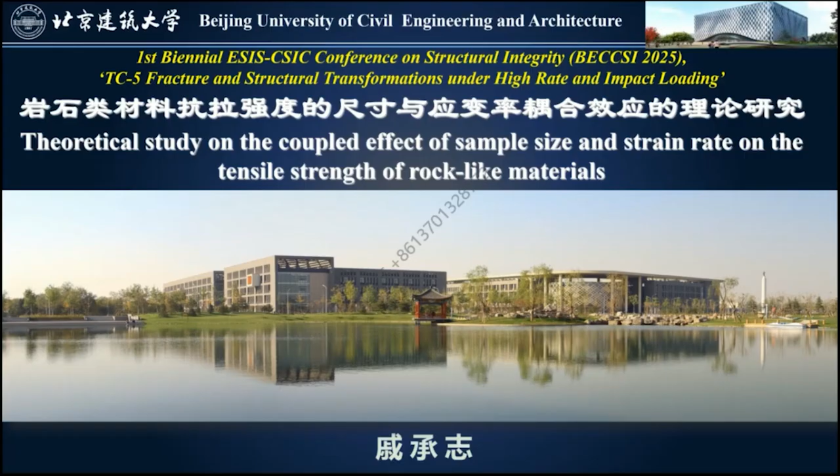My report includes the following parts. The first part, introduction.

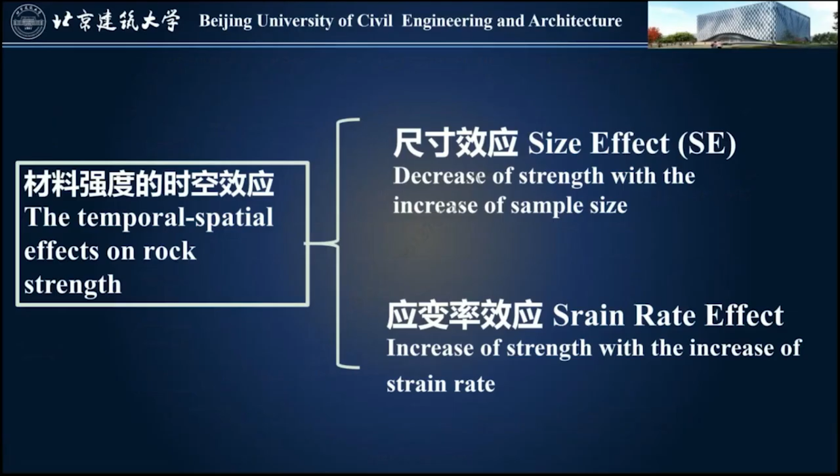The temporal spatial effects on rock strength include size effects, meaning decrease of strength with the increase of sample size, and the strain rate effect, meaning increase of strength with the increase of strain rate.

As to size effects, there exist several models. The first, statistical model, described by Weibull's theory of random local material strength. The second, type 1 size effect, energetic or deterministic nature, occurring in the fracture caused by crack initiation on

the smooth surface of the sample. The third, type 2 size effect, occurs in materials with a deep notch or deep stress-free crack formed stably before reaching the maximum loading. This model is based on fractal or self-similarity concept.

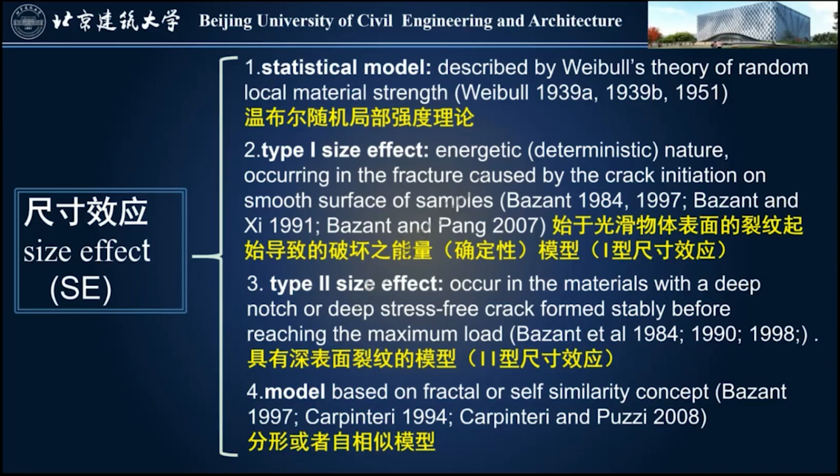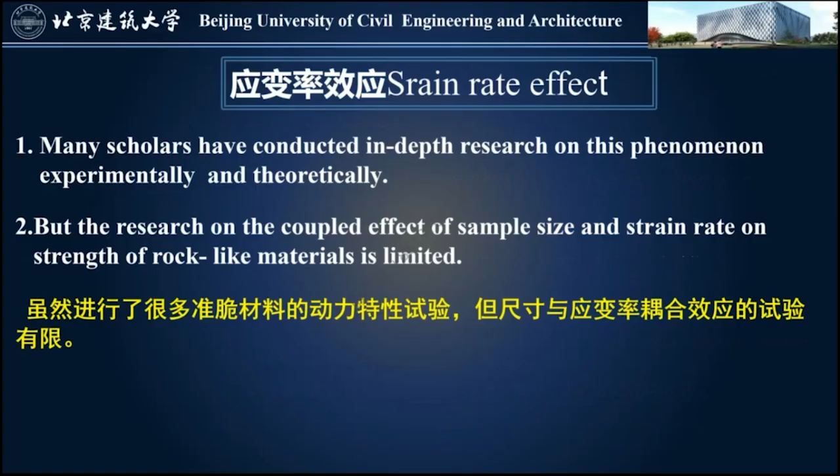As to strain rate effect, many scholars have conducted in-depth research on the phenomenon experimentally and theoretically, but the research on the coupled effects of sample size and strain rate on strength of rock-like materials is limited.

Study of Hong et al. on several kinds of rock under compression revealed that the dynamical strength of rock increases according to the power law with the increase of strain rate, and at the same strain rate, the dynamical strength of rock increases with the increase

of specimen size. For a specimen of certain size, there exists a critical strain rate below which the static size effect dominates. For a given strain rate, there is a critical size. When the sample size is larger than this size, the dynamical size effect is dominant.

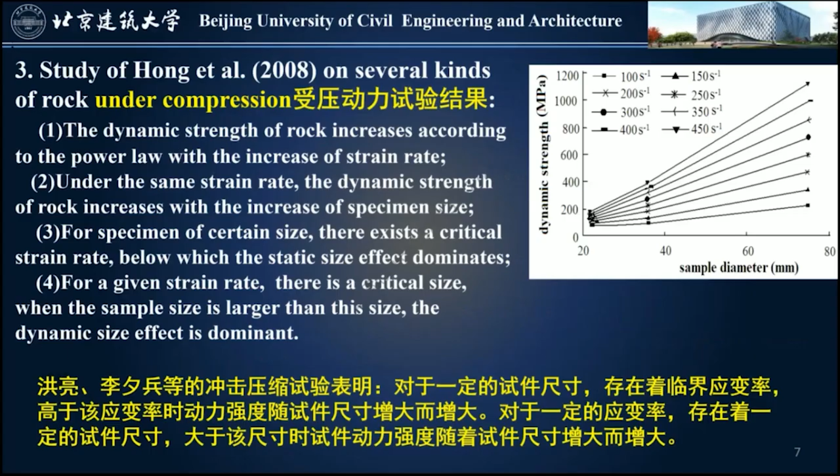Qi et al. explained the dynamical size effect observed in Hong et al. Qi et al. revealed that the essence of the strain rate effect is that the deformation and fracture process of small-scale elements in the sample are activated before the complete breaking of the sample, with the increase of strain rate due to the finite crack propagation speed.

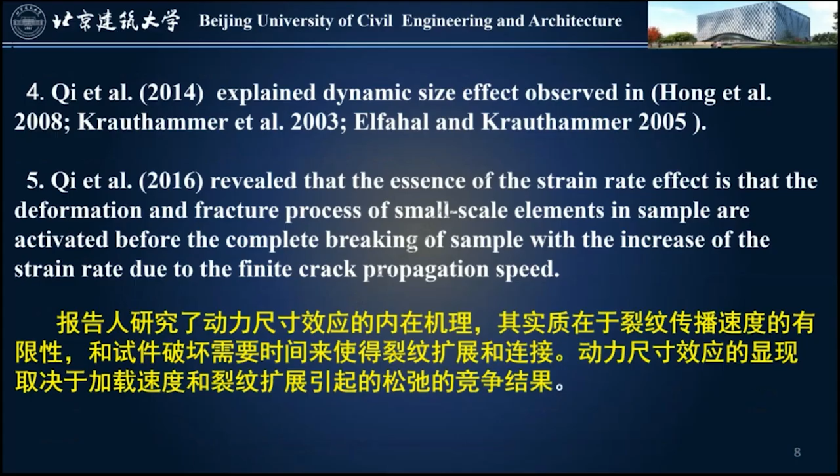Asadi et al. studied the combined effect of loading rate and sample size on tensile strength, and revealed that the notched specimen is more sensitive to the loading rate.

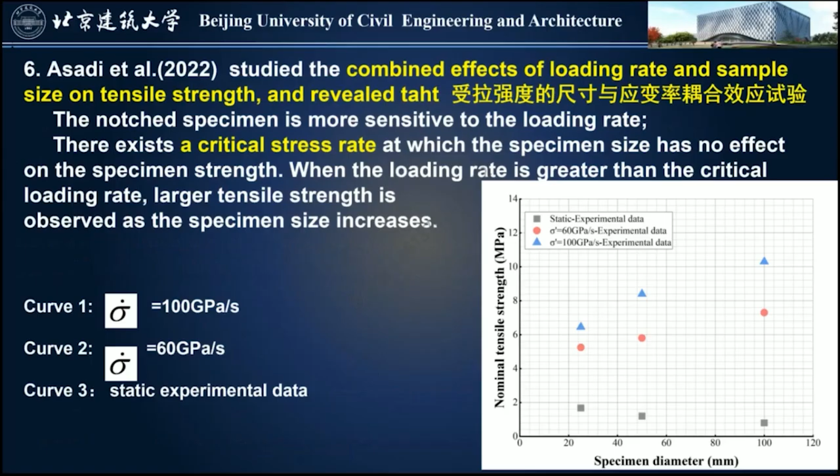There exists a critical stress rate at which the specimen size has no effect on the specimen strength. When the loading rate is greater than the critical loading rate, larger tensile strength is observed as the specimen size increases. This figure shows the experimental data.

Remarks: The current research on the coupled effect of sample size and strain rate on strength of quasi-brittle material was basically experimental. Some formulae for the coupled effects of sample size and strain rate on strength were obtained by data fitting. The physical meaning of the obtained data fitting formulae is unclear.

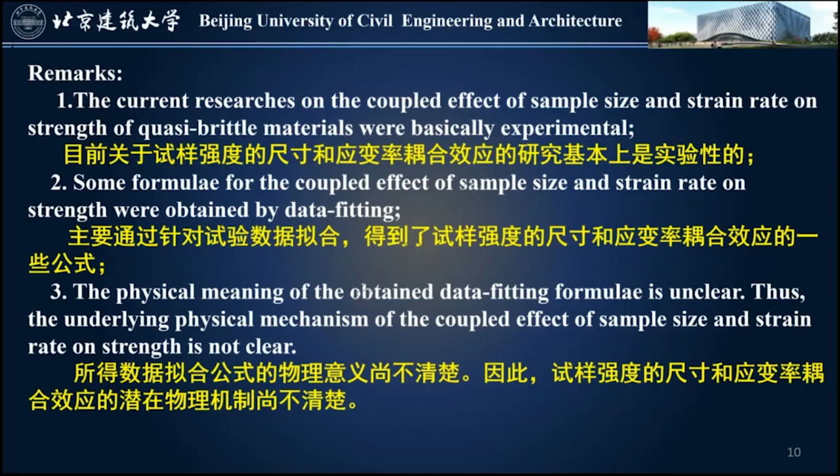Thus, the underlying physical mechanism of the coupled effect of sample size and strain rate on strength is not clear. Therefore, the purpose of the study is to quantitatively predict the nominal tensile strength of rock mass with different sizes and different strain rates, to clarify the underlying physical mechanism of coupled size and strain rate effects.

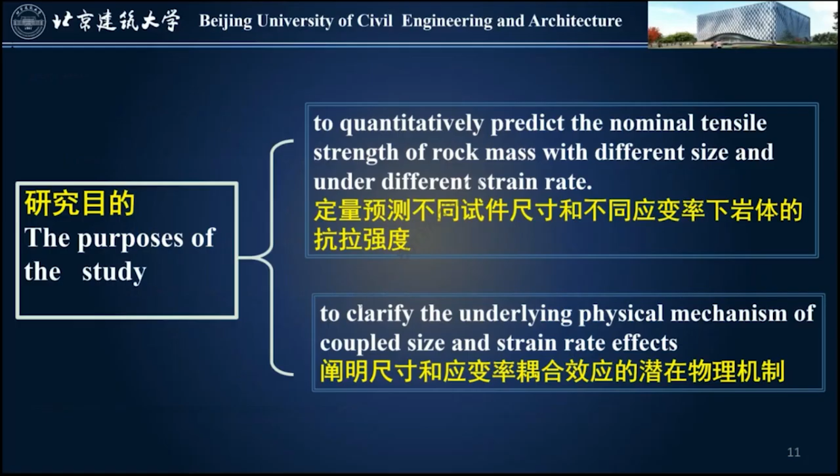Part 2: The coupled effects of sample size and strain rate on tensile strength in the quasi-static regime. The dynamical tensile strength includes two parts: the thermally activating strength component under quasi-static loading, and the macroscopic viscous component under dynamic loading. In the following, we examine the two parts of strength.

And the quasi-static tensile loading: Deformation and failure of material is a thermally activating process.

The expected lifetime of material can be determined by the Zhurkov's formula, in which U0 is the activation energy, sigma T is the uniaxial tensile stress, gamma is the activation volume, K is the Boltzmann's constant, T is the absolute temperature, tau 0 is a temporal parameter in the order of Debye's vibration period of atoms.

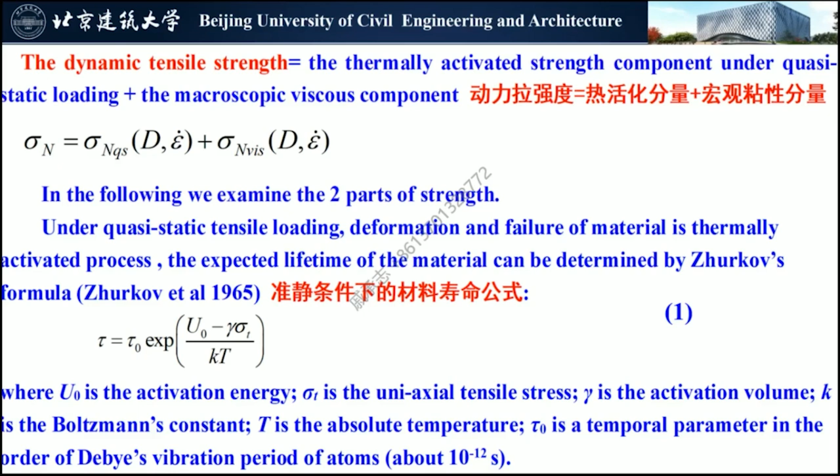From equation 1, we can obtain the dependence of strength on strain rate as equation 2, where epsilon dot is the characteristic average strain rate during loading.

Epsilon 0 is the deformation limit at failure. Epsilon 0 dot represents the maximum possible strain rate in the material.

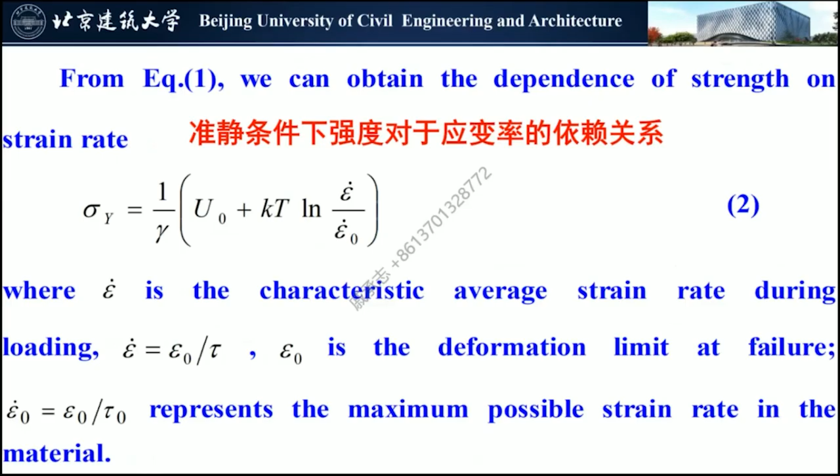If the quasi-static tensile strength test is carried out at the reference strain rate epsilon r dot, and the corresponding strength is sigma r, then we have the following expression.

Therefore, the relationship between the strength sigma y at arbitrary strain rate and the strength sigma r at the reference strain rate epsilon r dot can be expressed as equation 3, where alpha is the model coefficient. The logarithmic dependence of strength of material on strain rate has been confirmed by many experiments under quasi-static loading.

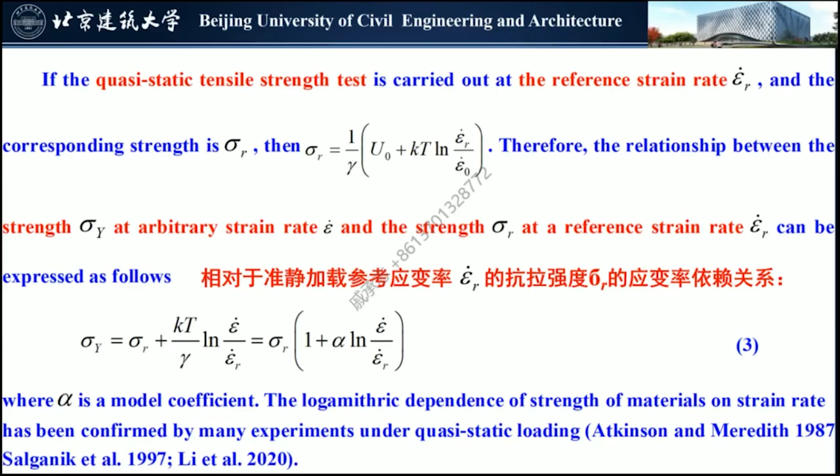For the sample size effect, the static strength sigma r of a material can be expressed as the following function of sample size, as proposed by Bazant, by equation 4, where sigma r0 and dr0 are material parameters. Here, we assume that alpha is independent of sample size.

The formula for strength, considering the size effects and the quasi-static loading condition, can be expressed by equation 5. Under the quasi-static loading condition, the sensitivity of strength of material to strain rate is mainly controlled by the thermally activating mechanism.

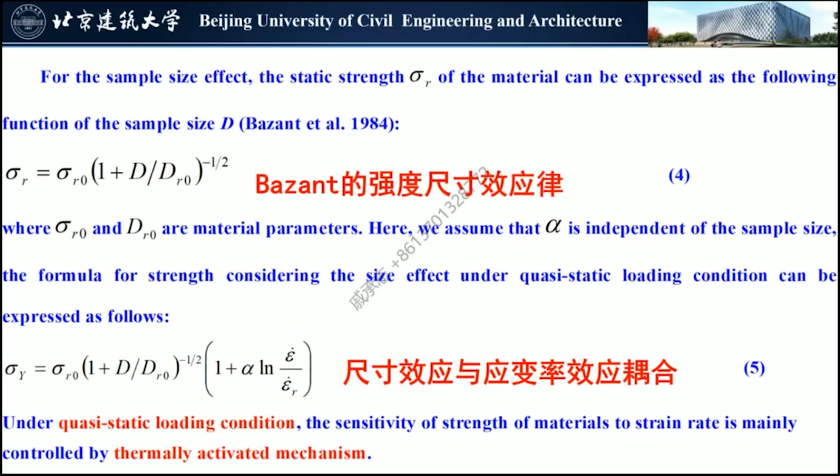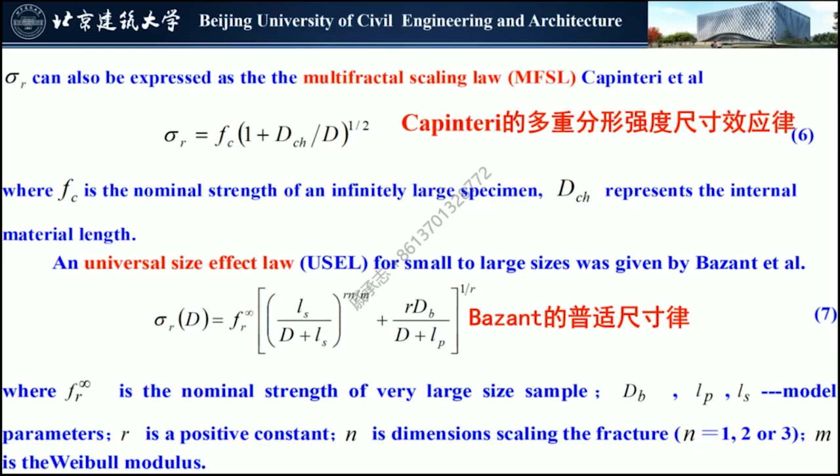A universal size effect law for small to large sizes was given by Bazant et al. as equation 7, where Fr-infinity is the nominal strength of a large size sample, dB, Lp, Ls are model parameters, R is a positive constant, N is a dimension scaling the fracture, and M is the Weibull modulus.

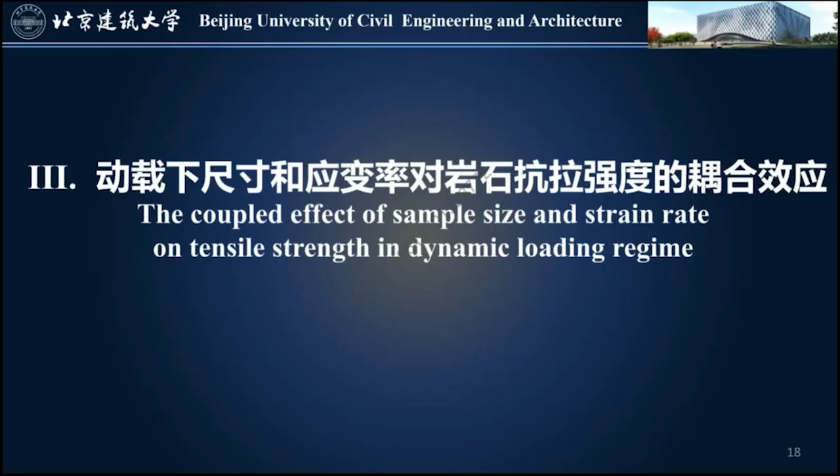Part 3: The coupled effects of sample size and strain rate on tensile strength in the dynamical loading regime.

Weibull's theory includes the weakest link assumption. The number n of activated cracks in unit volume under action of stress sigma is expressed as equation 8, where

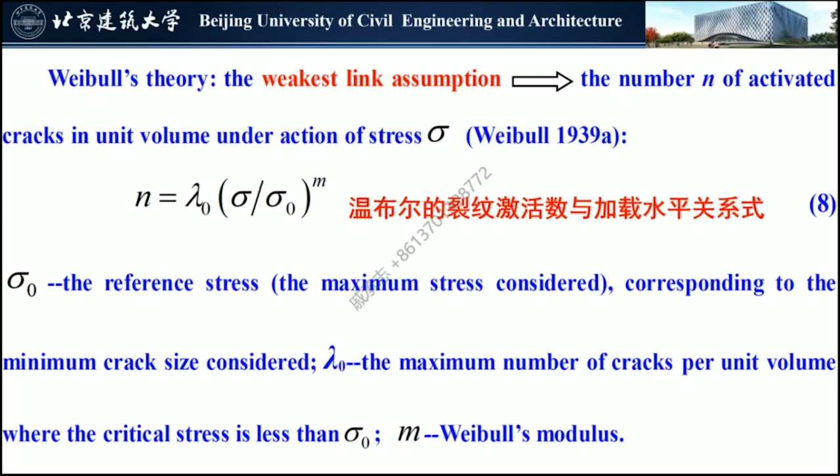sigma 0 is the reference stress, the maximum stress considered, corresponding to the minimum crack size considered. Lambda 0 is the maximum number of cracks per unit volume where the critical stress is less than sigma 0.

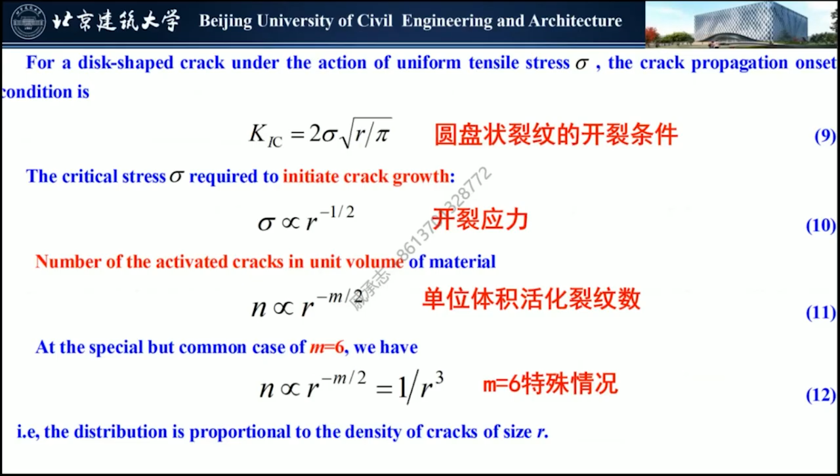From equation 10, we can see that larger size cracks are more easily activated. With the increase of sample size, more cracks of larger size appear, and the upper limit of the size distribution increases. Subsequently, the activating large cracks will be more, and the density of activating cracks of a certain size R will be less.

To account for the decrease of activating cracks of a certain size with the increase of sample size, we introduce the term d minus theta into the distribution function, giving us equation 13, in which the additional parameter theta greater than 0 is introduced.

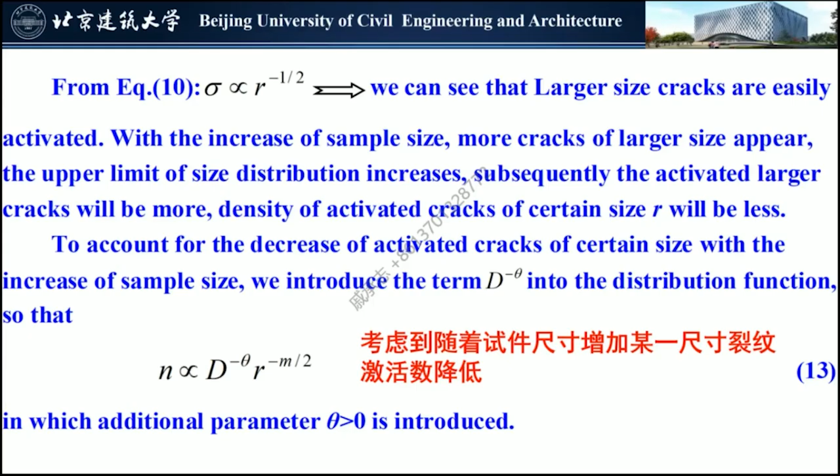The reciprocal of the crack density n represents the volume occupied by a crack, and the cubic root of the volume occupied by each crack determines the average distance L between cracks at this scale level. It is determined by equation 14, where d1 is a constant.

We determine the size R of defects that coalesce first and lead to the final failure of the specimen, under the condition of constant strain rate.

The propagation initiation stress for the crack with radius R can be determined from equation 10 as equation 15, where K1 is a constant.

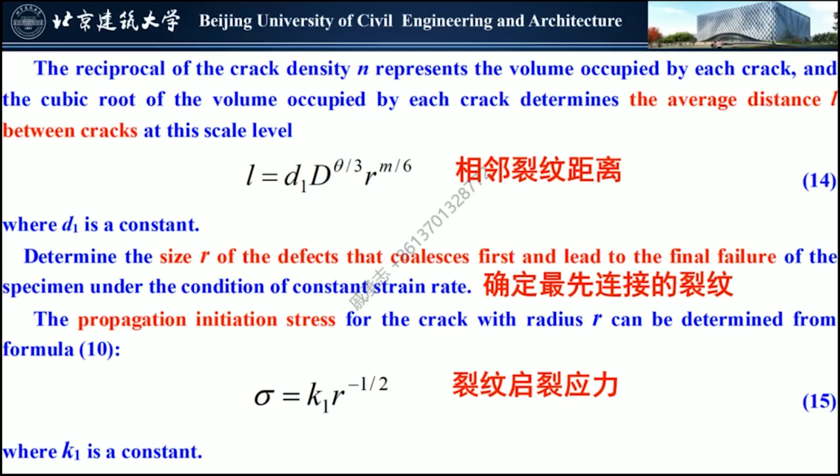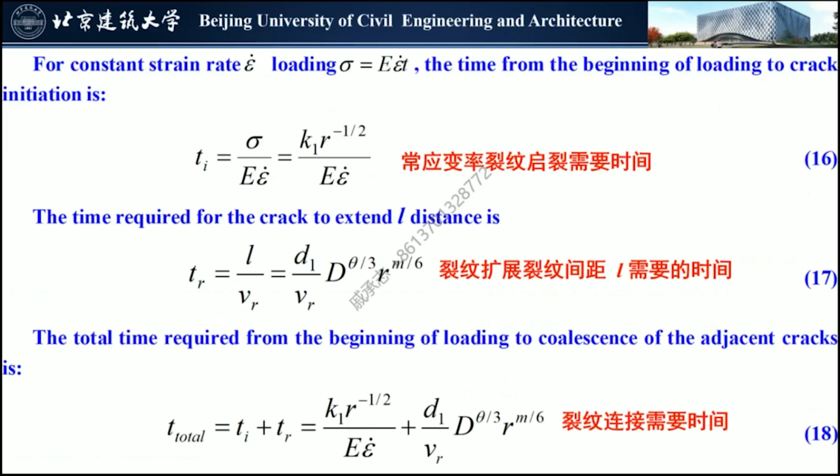For constant strain rate loading, the time from the beginning of loading to crack initiation is determined by equation 16. The time required for the crack to extend distance L is determined by equation 17. The total time required from the beginning of loading to coalescence of adjacent cracks is determined by equation 18.

From equation 18, if its derivative with respect to R equals 0, the size Rc of cracks that coalesce first can be determined, as shown in equation 19.

The total time required from the beginning of loading to coalescence of the adjacent crack is expressed by equation 20, where d3 is a model parameter.

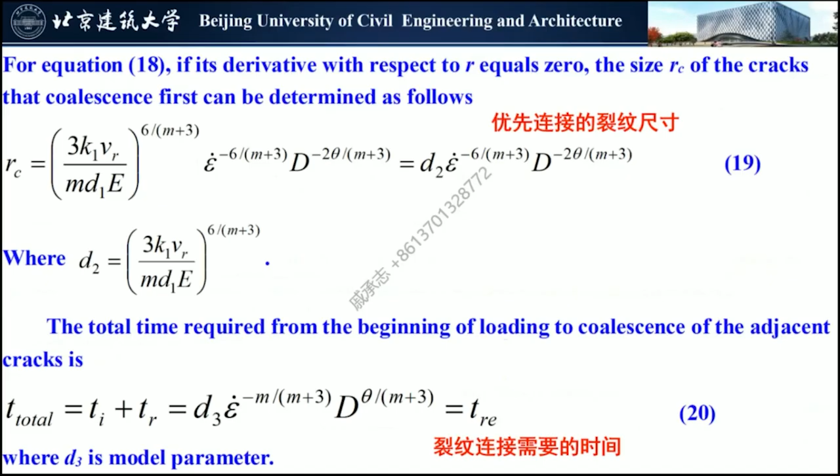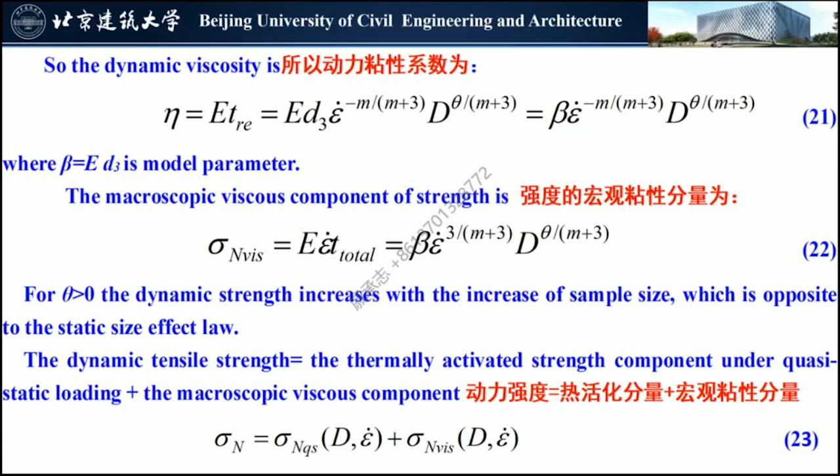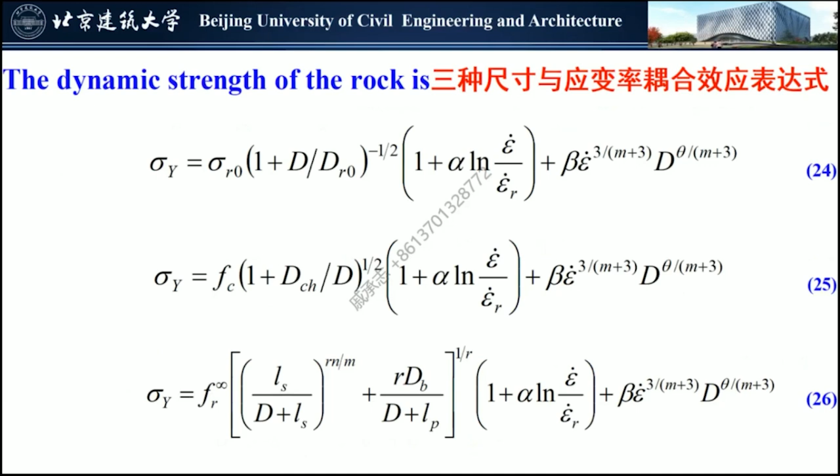Therefore, we have the following three kinds of expressions for the dynamic strength of rock.

Part 4. Validation of the proposed model.

For quasi-static loading, the term with logarithmic dependence is really weak and can be neglected. For the parameters sigma r0, beta, m and theta, we take the following values.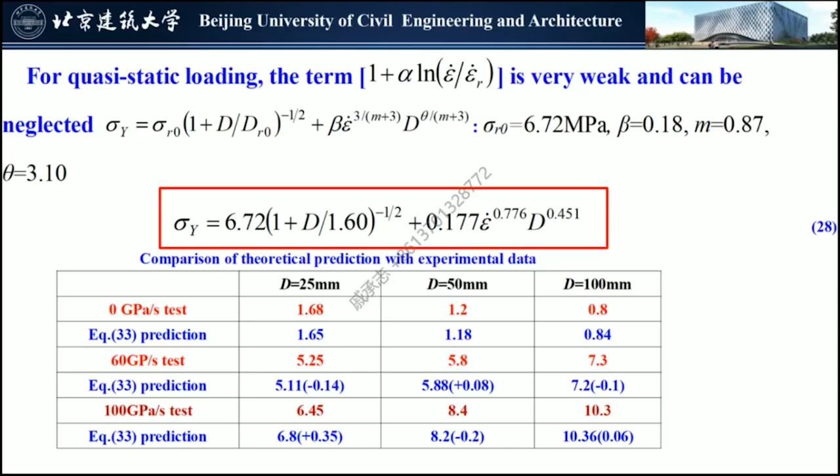The comparison of the theoretical prediction with experiments is shown in the following tables. We can see that the agreement is very good.

The agreement can be observed in the following figures.

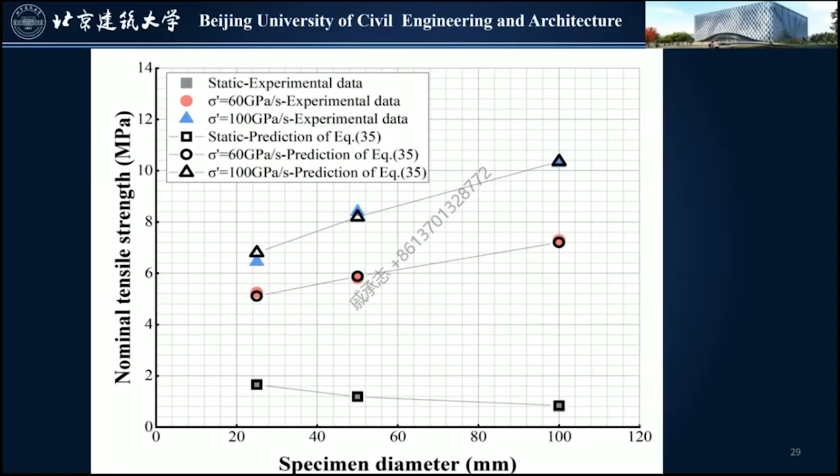The intersection of the two terms in equation 28 gives us equation 29, which determines the critical strain rate at a fixed sample size, and the critical sample size at a fixed strain rate, above which the dynamic size effect dominates.

For example, from equation 28, we have the following equation for determining the critical strain rate at a fixed sample size, and the critical sample size at a fixed strain rate, as equation 30.

The difference between the model proposed here and the model in Asadi is that, in our model, the critical loading rate depends on the sample size, and the critical sample size depends on the loading rate.

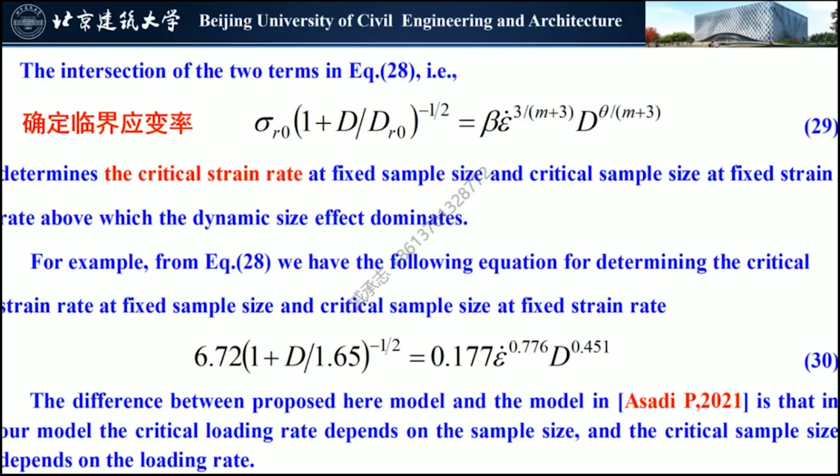For three kinds of rock samples with diameters of 25, 50, and 100 millimeters, we have calculated the critical strain rate and the critical nominal tensile strength, and the average of the three sample sizes.

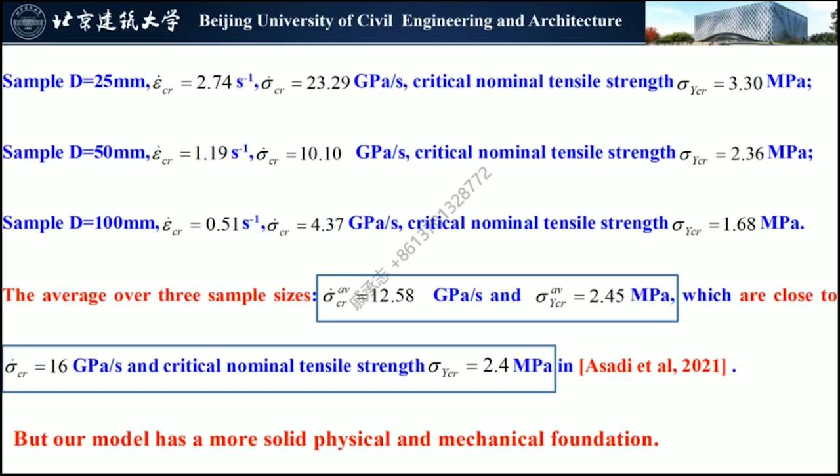The obtained values are close to the values obtained by Asadi et al., but our model has a more solid physical and mechanical foundation.

Part 5. Conclusions.

In the quasi-static loading regime and in the dynamic loading regime, the formulae for the coupled effect of sample size and strain rate on nominal tensile strengths are obtained.

The above formulae are superposed to obtain the unified formulae for the coupled effects of strain rate and sample size on nominal tensile strengths.

The critical strain rates and the critical sample sizes are determined.

The comparison of the theoretical prediction with experimental results shows good agreement, indicating that the proposed model is reasonable.